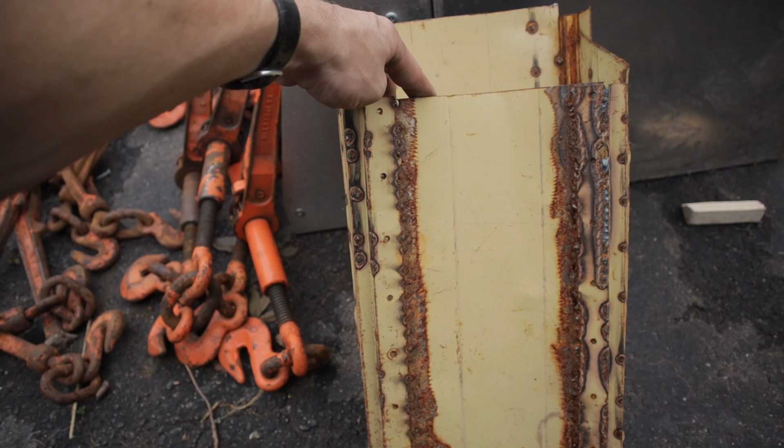Alright guys, so in part one of this project I built this thing and it is a pile of crap. The metal was way too thin and it actually started warping around the welds, and all the holes that I welded through by accident - that's scrap metal now.

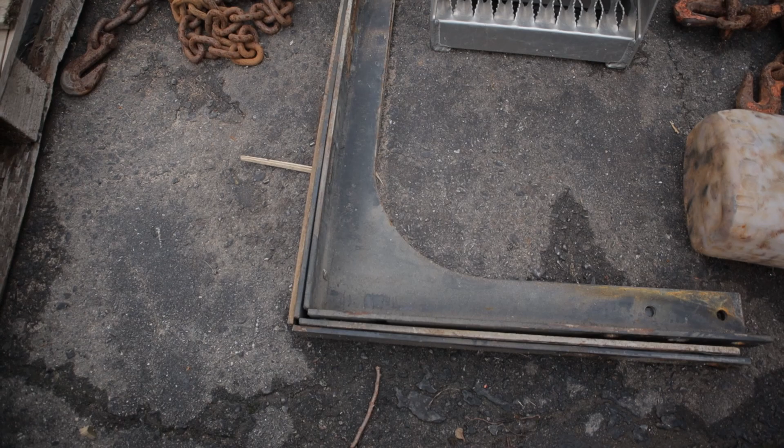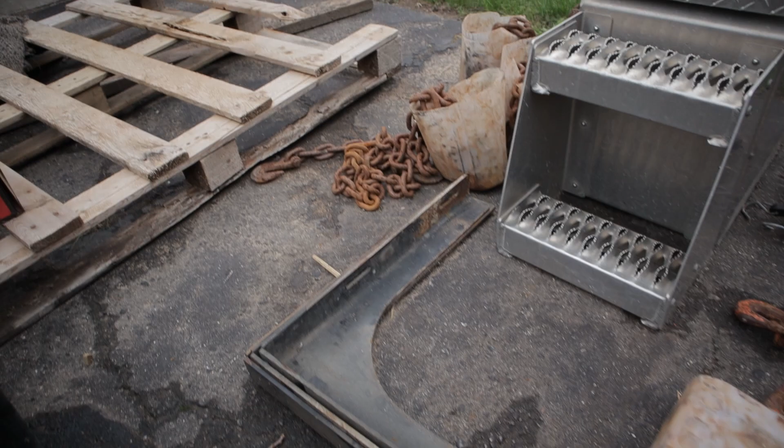I'm going to do a slightly different design with these, but the first part of this project is going to be working on the actual box brackets to mount it to the truck. I don't know if you've noticed, but when it sits on the truck, the boxes sit kind of high, and I want them to be level with the steps on the front. So I'm going to drop these down 6 inches or so. I went and purchased some angle iron to do that.

So we're gonna grab that angle iron, mark out the holes and put the holes, and then just kind of weld the angle iron onto the brackets, and it should work out in my mind. We'll see.

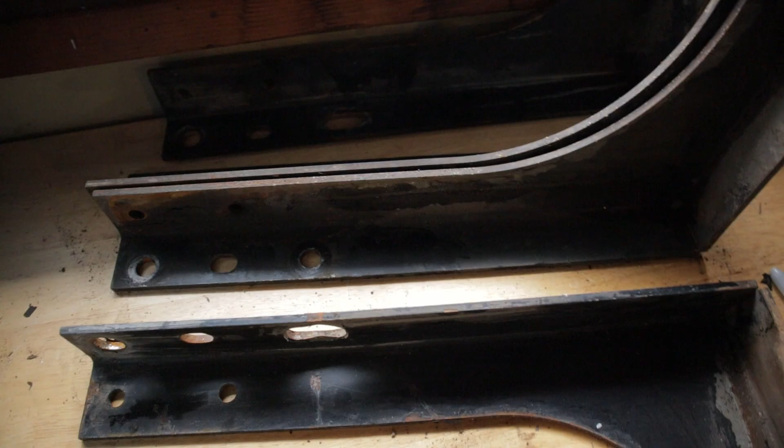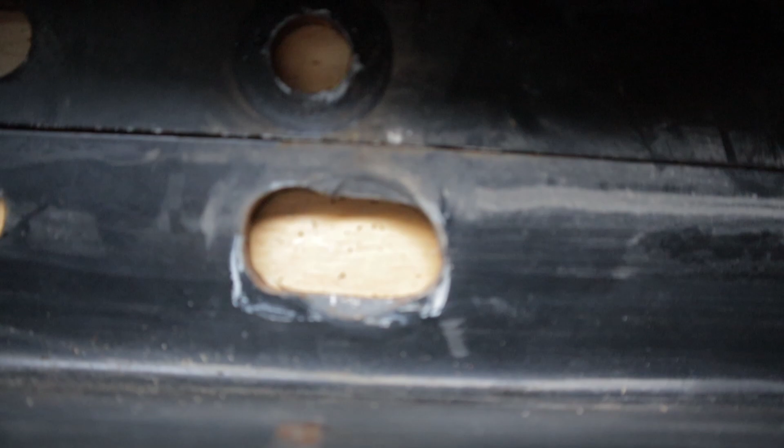So we'll make a quick note on these brackets, how they were made. You can see that there's 3 holes that are normally mounted, but 2 of my brackets were re-drilled because the hole is in a slightly different position. I'm thinking that that mark right here is where the washer sat, and that's where the hole is. But it's like that for one of each side.

So it's not quite as simple as drilling this hole and this hole. It's like that for 2 of them, but for 2 of them I'm gonna have to guess where that hole is because I didn't take measurements of the holes in the frame before starting on this project, and it's not like I can go out and measure the truck in the driveway, because it's not here.

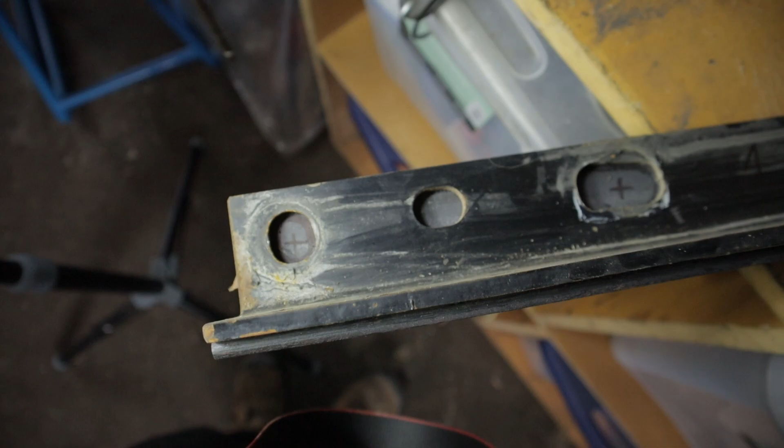Okay, so I have the holes of the original brackets marked on the new brackets, and I numbered each one to their panel because they're all unique, it seems. The idea is that we take this angle iron and drop it down approximately 6 inches. Now I did measure that these holes are about 5.5 inches apart, so if we drop it down to the last hole, it's going to be close enough.

But let's just take a tape measurer because I might need to redo some of these holes. So with this new - come on, focus - with this dropped bracket, or this dropped hole, it's actually 6 inches if we drill it right to that hole.

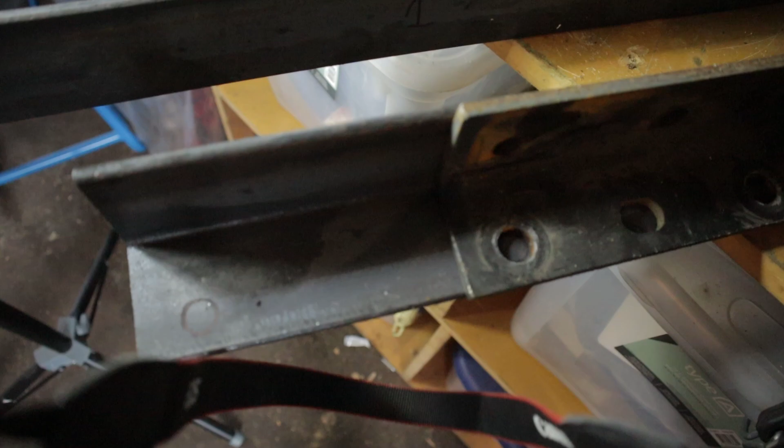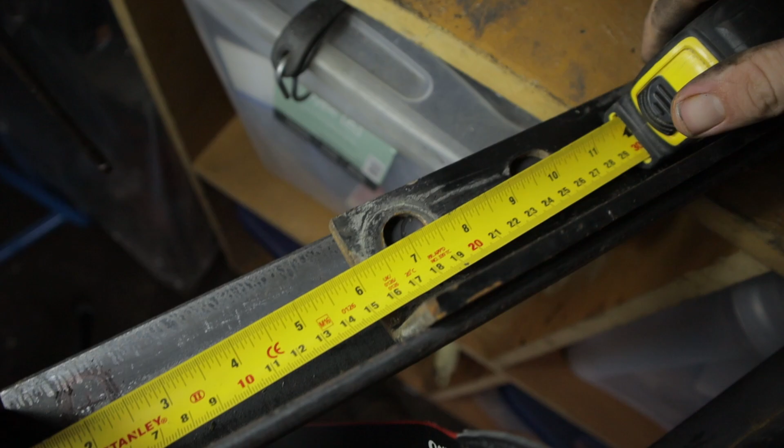But if we move to the other side with a normal bracket, I bet you it's going to be 5.5. Yep, 5.5. So the one with the re-drilled holes, we're not going to have to, but we're going to have to re-drill a hole through this as well. Because if you have one at 5.5 and one at 6, the box isn't going to sit level.

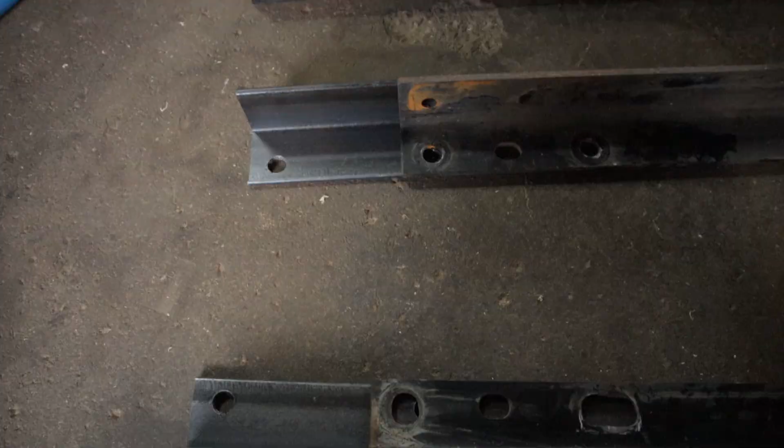So this is what the bracket's going to look like. Now you can notice that these holes are drilled where they're supposed to be to line up with the frame on the new piece. And then the ones where the hole was re-drilled, it's not quite realigned.

So I'm going to tack it together and then flip it over and drill a new hole through the old bracket to make it fit. And once you do that, should be good to go.

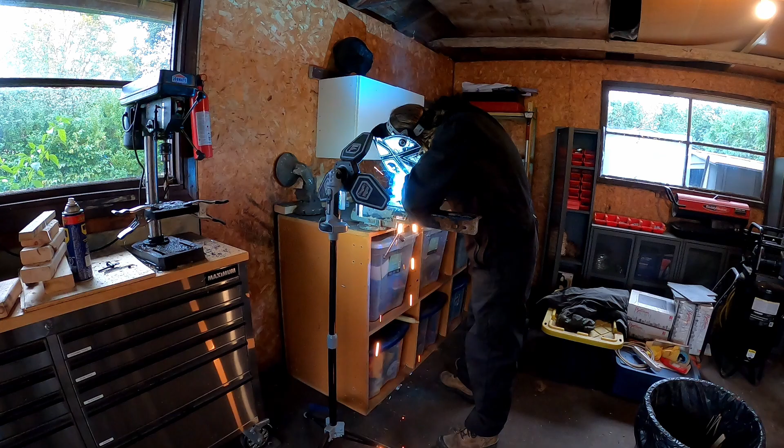That's where we started. Come on. See, there's a couple little holes, I guess. I also burned my feet - I burned my foot right around there. I had to stop and cover up my boot, and then do another bit, and then a good long pass.

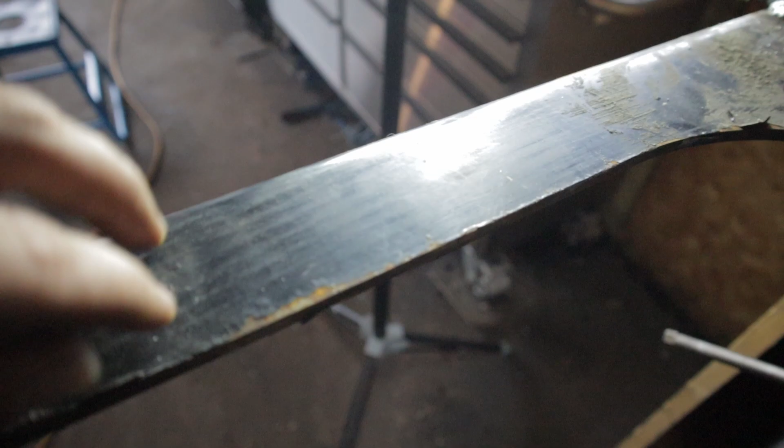Started to get sloppy because I had no base to rest my arm. And then once I could rest my arm on this part, I could do a nice solid bead. Come on, focus at the right place. All the way along there with one little stop.

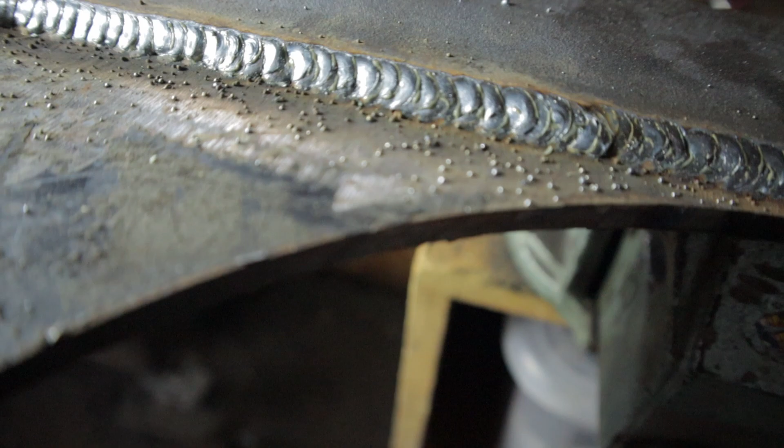Practice makes perfect, let me know where I can improve. I think right around here I wasn't getting this part of metal enough, so I started digging down deeper into it. Ow, it's still warm.

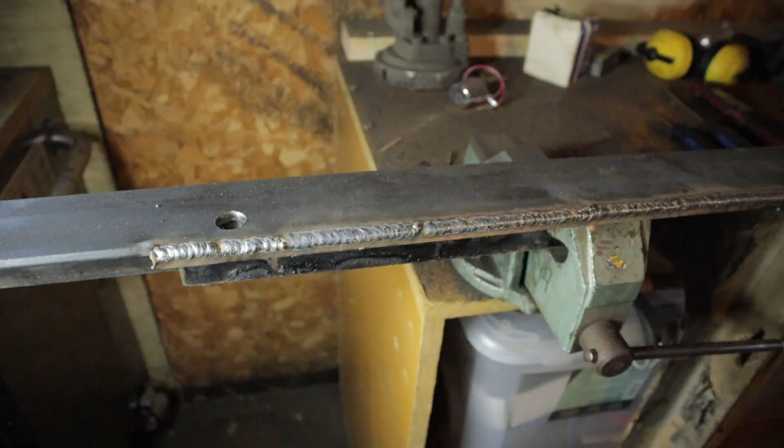Okay, so I'm definitely having problems with electrical supply for this welder right now. I can get about 10 seconds in before it blows the fuse. I don't know how I got the other side all done, and then where was it? Right about here is when it kicked off.

Then I got about here, kicked off again, here, kicked off again, and then I just went on the minimum setting and just finished it off really slow, trying to keep the puddle up.

But apparently this is supposed to be on a 20 amp circuit, and I looked at the wiring from the fuse panel in the house all the way underneath up to the light switch, and it's actually 220 wire with the red wire just dangling in no man's land. It's not powered, but it's the proper 12 gauge wire for 220. So if I put a 20 amp fuse in the fuse box, it'll be okay up to that light switch. The question is whether from that light switch all the way up to that power plug it's going to be the same wire.

If not, I might have to put in some plugs along the ceiling boards or something. But yeah, it's supposed to be 20 amps. I don't know how I got away with a 15 amp breaker for so long, and then all of a sudden it starts popping all the time. But yeah, that'll be another project.

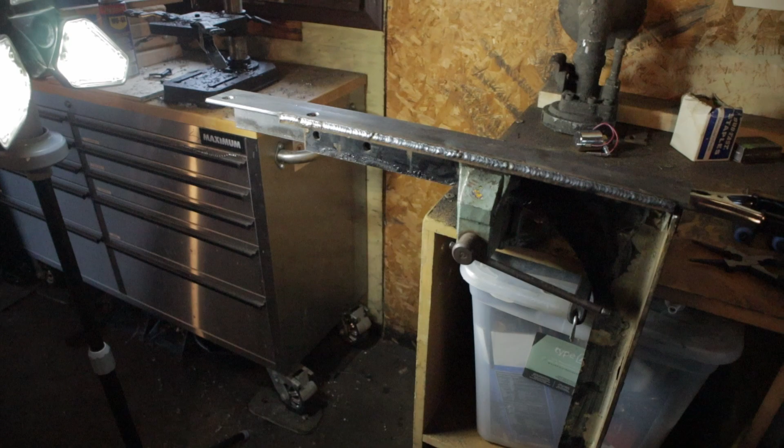Anyways, I can't keep up welding the next 3 brackets with the way it is right now, so I think I'm going to call it a day, make some dinner, and get back to it another time.

Alright, who's honking? Anyways, it's a few days later, and I'm done my welding.

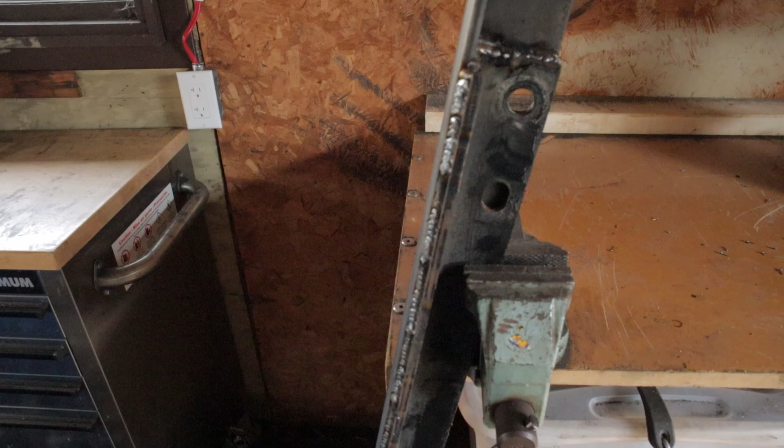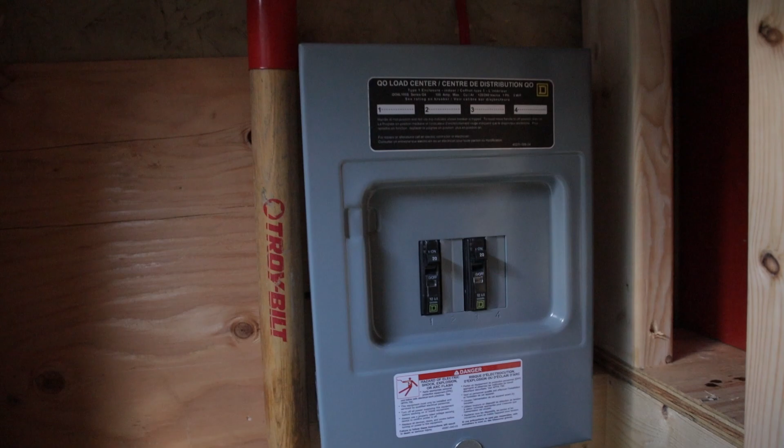I have all 4 of these brackets welded on now. I actually had to go through and wire in a 20 amp circuit into the garage. So I can look over here - hold on, alright, look over here, there's a new breaker box. Had it all wired in, then cleaned up the garage after that.

Now I'm not blowing fuses every time I use the welder, but apparently this thing is only rated up to 1/8 inch steel, and this is 1/4 inch, so it's definitely more than what it's supposed to handle. I had a lot of issues with it balling up at the end of the stick, which apparently is because it's not enough of a welder.

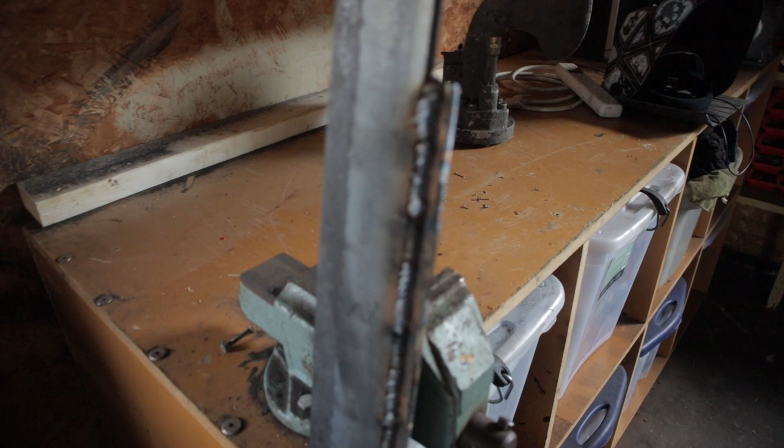But yeah, it's done the job. I had to start going at it, doing an inch at a time, going through, and then coming back and filling up the gaps between. Hopefully it's enough penetration to do the job structurally sound.

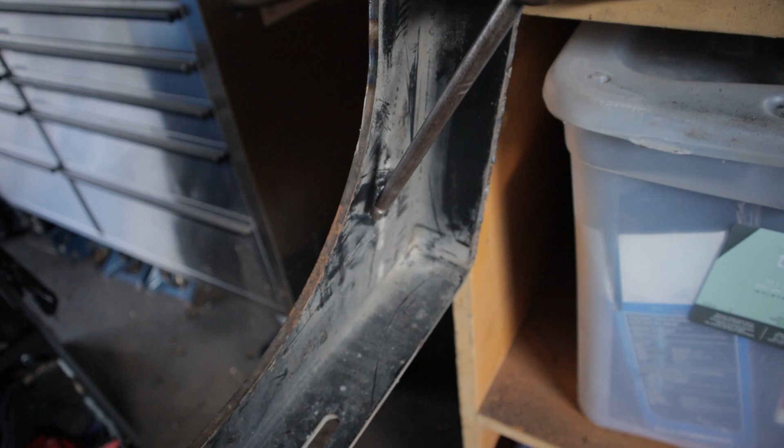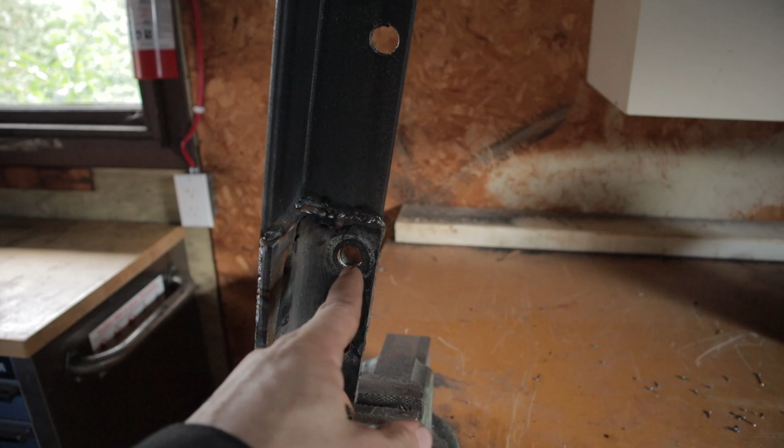Can't really tell much on the inside there, just a little bit of discoloration. But I figure with the bolt there and the bolt there, this one's going to be holding the bracket in, and basically that extra angle iron is just counteracting the sideways force from all the weight in the side box. So these welds actually aren't doing all that much as long as it's bolted in there.

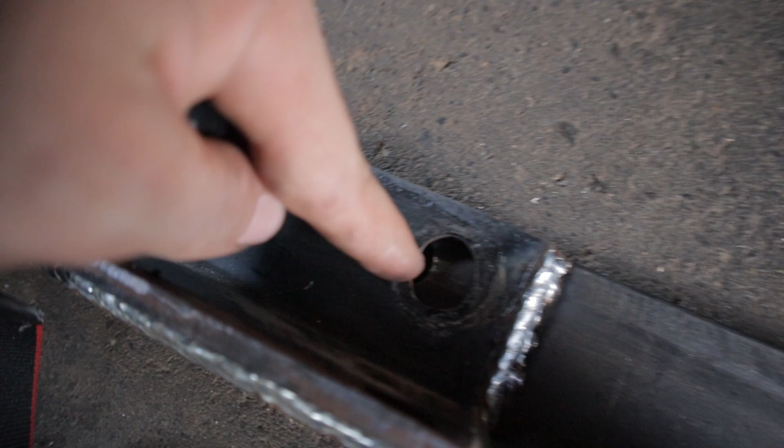So 2 of the brackets, the holes are done and lined up just fine. The other 2, I have to re-drill this through the bracket. Same with this one. So I'll do that, and then it's time to start painting them.

Hopefully that one cools down enough, and they'll be done. Right, Gizmo?

Okay, here we are, another day working in the shop. This is going to be the last day of my almost 2-week vacation now. I did get the truck back - clutch might be slipping, so we'll see.

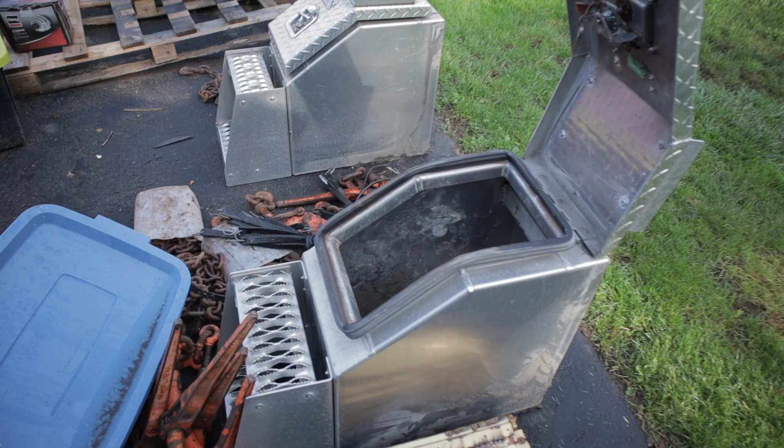But anyways, we're finally actually going to get to the side box organizers. So, yeah, this piece was what we worked on last time. Part 1 goes at the front. I'm not using that, that's just scrap metal.

I'm thinking of a different design right now. Basically hang the chains, or hang the binders here, and have the long part sit on top of the chains, and have the chains in the middle, with some dividers I'm going to build up, and then the bungees at the front. I'll draw up my design, get some measurements, and we'll figure out what we can do here.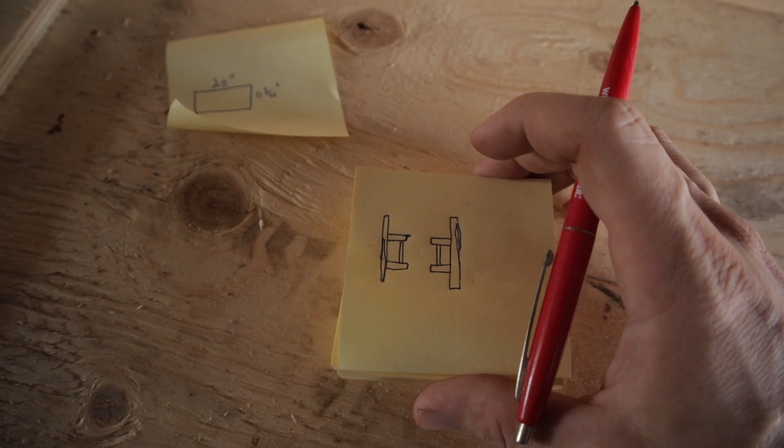Okay, so this is kind of the structure that I'm looking to do. This is from a top-down view into the side box. So this will be the length of it, 20 inches, because the side box is 20 by 11 3/4 on the inside. It might actually be less than 20, but we'll see.

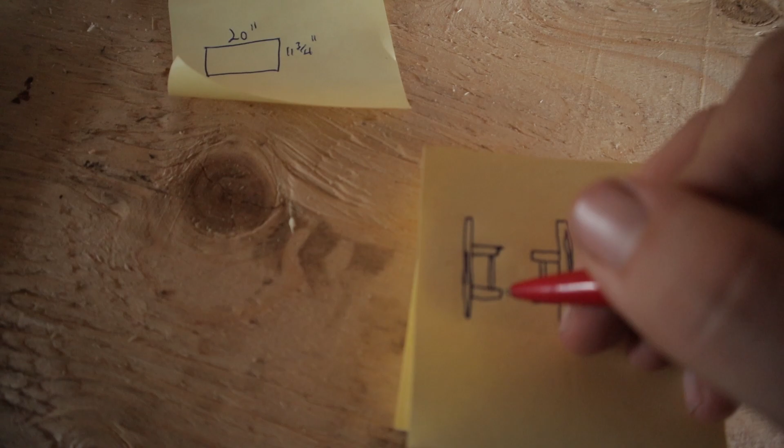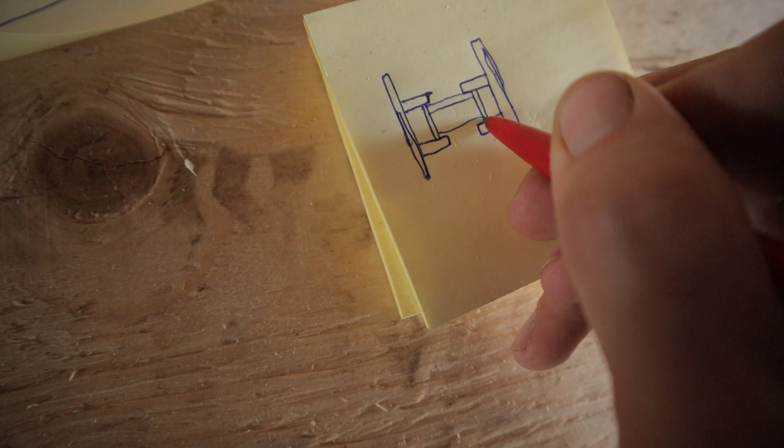Yeah, so there's going to be these two pieces, and then I'll probably make one more piece that'll act as the other two dividers right in the center there. So you put in the two side pieces, they fit right to the walls, and then you drop in the third piece to hold it all together, and then you have 1, 2, 3, 4 spots to put the chains.

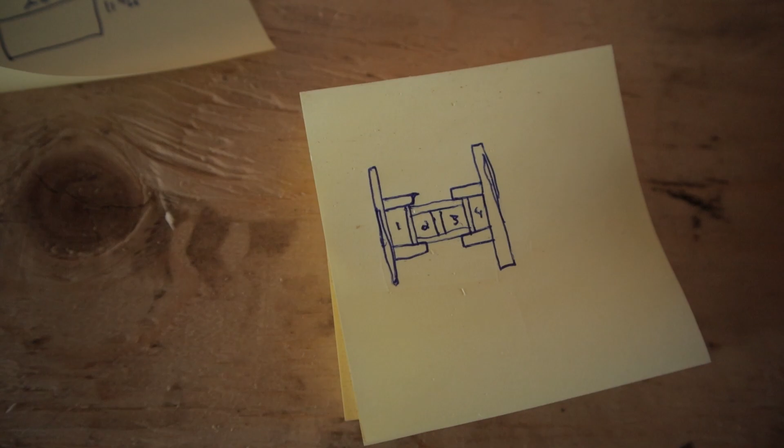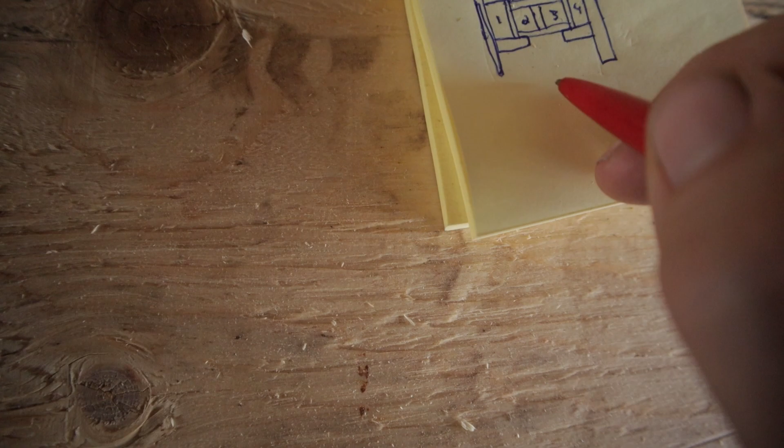And then if this is the back, there's going to be that bar up top, and then you hang the binders down there, and then there's this whole pocket for the bungees in the front. So we'll see how it goes. That's the plan, at least.

Okay, so this is kind of the start of the first base, and I need a piece that's going to go from here to here, but that's leaving like maybe 2 inches of space. But that's the size that I can get it to fit. Huh, I don't know what I'm gonna do here.

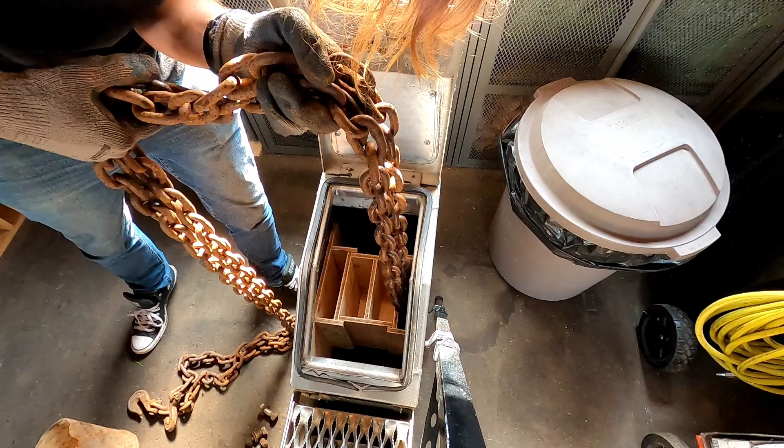These boxes are too small. That's one chain and it's taken up both boxes and it doesn't even fit. I was hoping to fit all four chains in this, but I guess I'm only fitting two and I have no idea what I'm going to do with the other two. This sucks.

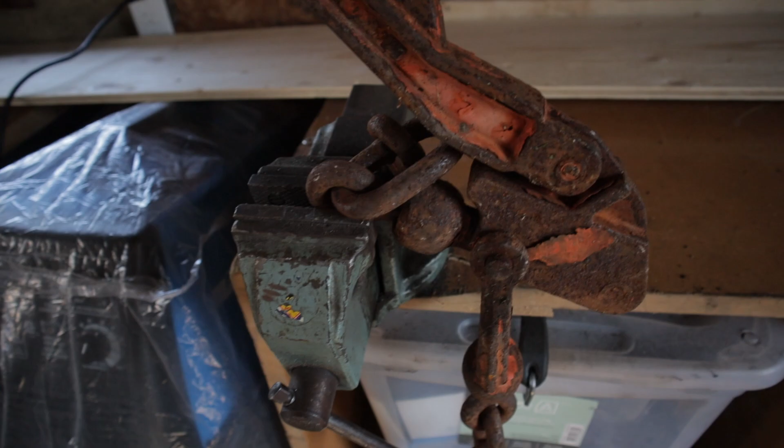Good thing I like to tinker around. So I just went and tried to unseize this bolt because I need to turn this thing around. I was prying on the shaft, and yeah, I need to build a new mount for the whatchamacallit, the vise. Hooray! I just went to try it on my second vise and snapped it right off.

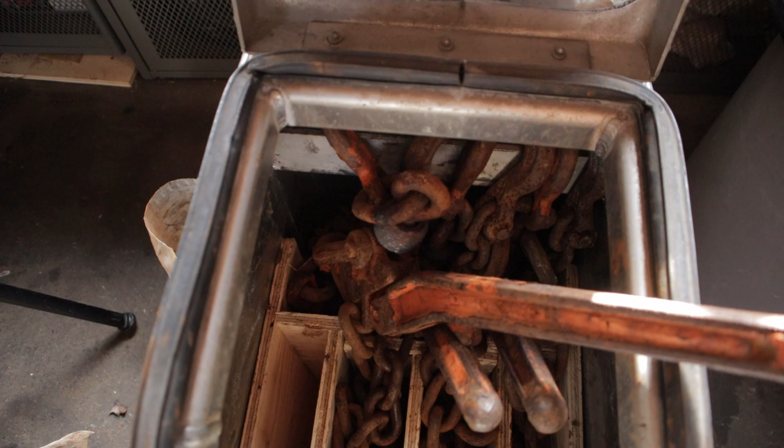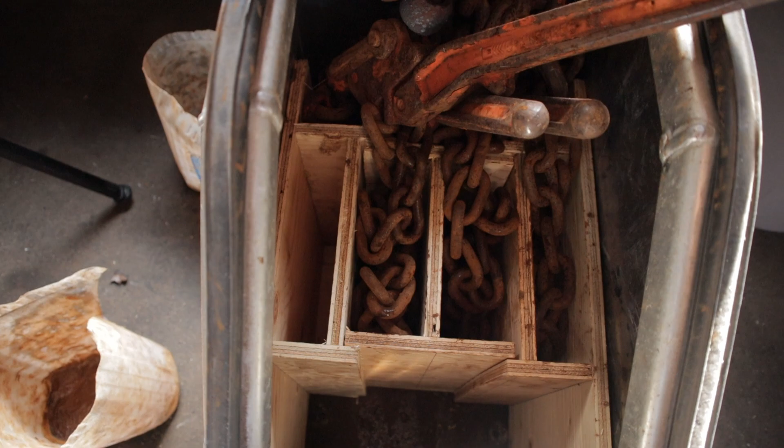I'm officially out of room at three chains. So I'm putting as much as I can in the box, and then the rest is going in the overflow behind the box, taking up the room for the binders. And yeah, it's not sitting so pretty. I'm wondering if I build the boxes taller, if that might help, but I'm definitely running out of room.

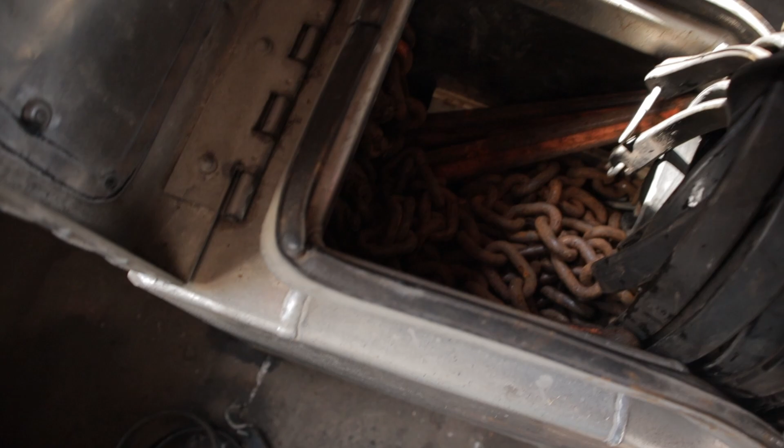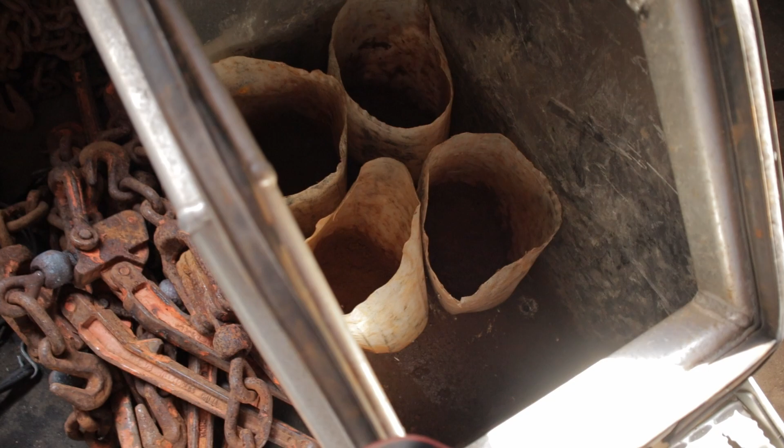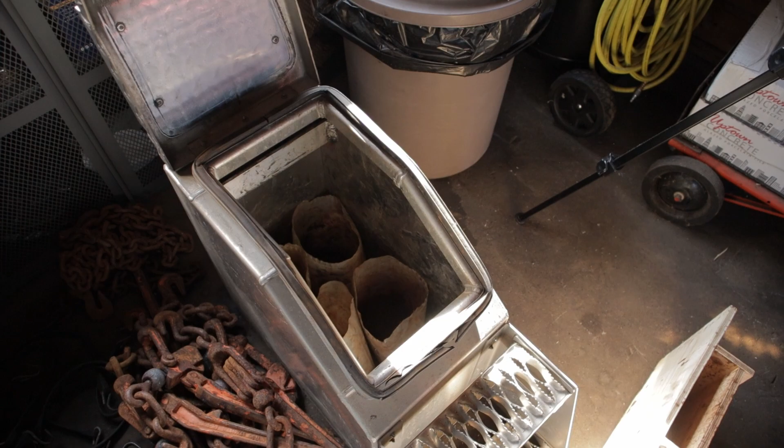What a pain, what a pain. Okay, let's see what we can do. Okay, I don't have room for the bungees. I crammed in four of the chains, four of the binders, and there's no space in the front for the bungees. So I'm thinking I'm scrapping this idea. I'm gonna go back to the original concept of the four washer buckets, but instead of washer buckets, I'm gonna utilize all this dead space between them and make just four buckets that'll fit in there, and then maybe I'll cram the binders up in the front and put a tray or something that'll keep the bungees away from everything else. Those were pretty too.